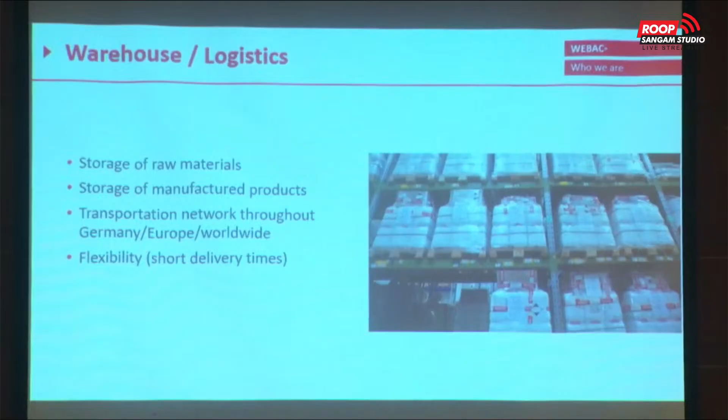Also part of our logistics is the storage of raw materials and manufactured products, because we want to be sure that if you give us an order, the materials needed anywhere around the world or in Europe can be delivered in a short time. That means about 98% of our materials are in stock, depending on the amount, but we keep enough in stock to make sure we can supply each job site in the world quickly.

By not only selling our canisters and our material, a big focus for us is also training—hands-on demonstration, whether in our warehouse, our house, or on job sites, including on-site training and on-site visits. Especially for bigger upcoming projects, we travel and are present on the job site to discuss solutions and method statements with engineers and designers. This can be done by me or my colleagues as application engineers, or if necessary, our R&D manager is also available for special cases.

Where are Webac products used? There are many points on the market, but the last point, restoration of existing buildings, is our main focus in the Europe region. This means we have a lot of materials for restoration, crack repair work, and injection against rising moisture, but also other big projects like dam constructions. You'll see some pictures and maybe videos about these constructions. Tunneling and mining is also a focus of ours.

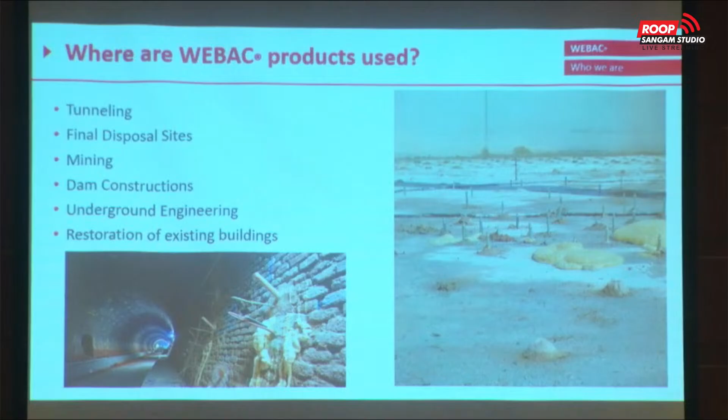What are Webac products used for? As I mentioned, injection against rising moisture—we speak about wet, damp, or dry cracks—structural repair works, joint sealing, and surface sealing for underground building components. All of this we try to cover, whatever the case on a job site.

Our main product range is polyurethane injection foam resin, PU injection resins, and injection gels, which are becoming more common for crack repair. For example, epoxy resins, silicate injection resins, and to cover all the services around them, injection pumps, packers, injection tubes—which are a good solution especially when building up your construction—and swelling tape. So we try to cover all services around construction and waterproofing.

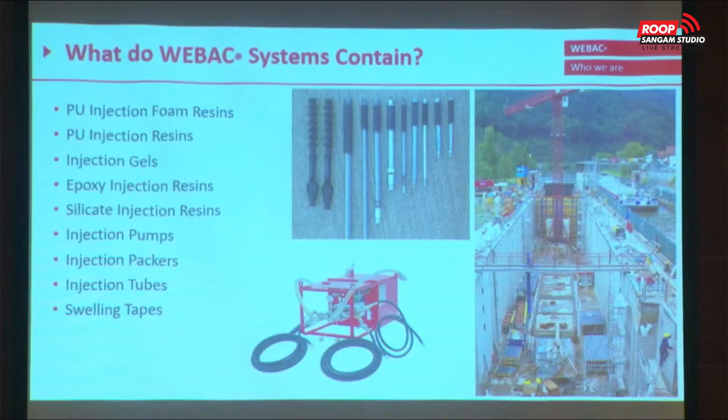So what does Webac offer? Innovative products—our formulas in the canister, our knowledge collected over more than 40 years. Complementary accessories, because the best product has to be applied with the best accessories; this is a necessary combination, otherwise it won't work. Quality products, service and training for clients and customers, being present on the job site, and of course, one-point individual solutions.

That means if we see that a special accelerator or product is needed for a kind of project, because of our R&D and short ways to them, we can deliver a total solution—an individual solution for your case.

Webac walks on two different legs, I would say. On the left side, we have the classic line—you see the building, it's more on the upper part of the surface, not strictly underground. The right leg is our consolidation line, which is more for underground construction, tunneling, mining, water stopping, but also soil stabilization and soil improvement, which is becoming more common in Europe because of climate change.

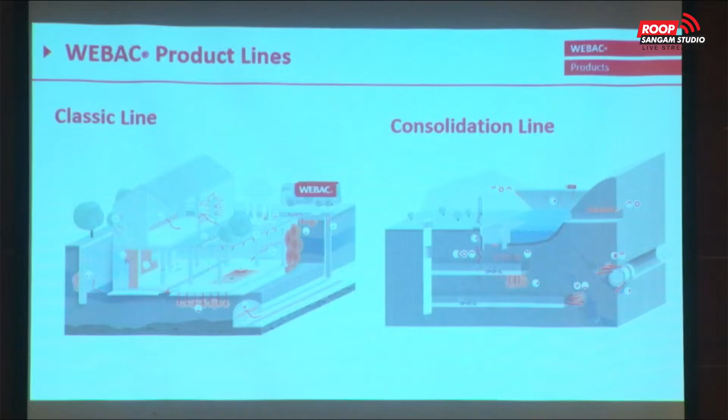Let's start with our classic line. You see the whole variation of where the products can be used, but we'll go into more detail regarding crack repair and waterproofing. Here you see special pictures showing variations of cracks. We have different options to seal cracks, and this is the point where I want to talk about the standard product line, the classic line.

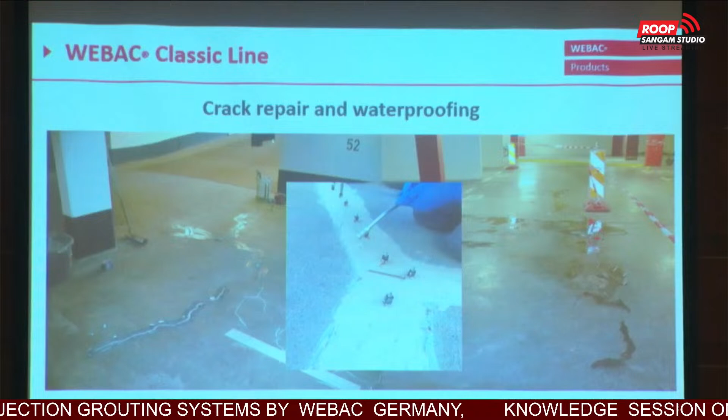Just a short overview of what we observe every day on the job site. When we speak about crack repair, mainly in Europe but maybe worldwide too, we speak about the crack repair norm, which is EN 1504-5. What I'll show now in a short table is what we face every day.

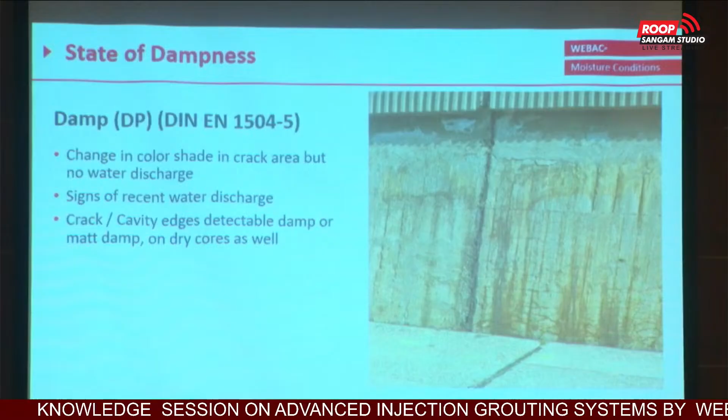We face dry cracks, where there's no impact of water—one case you find on the job site. We have damp cracks, with signs of recent water discharge, meaning black or dark shadows beside the crack. That gives us the indication it's damp, so we have to choose the right material or the right renovation approach.

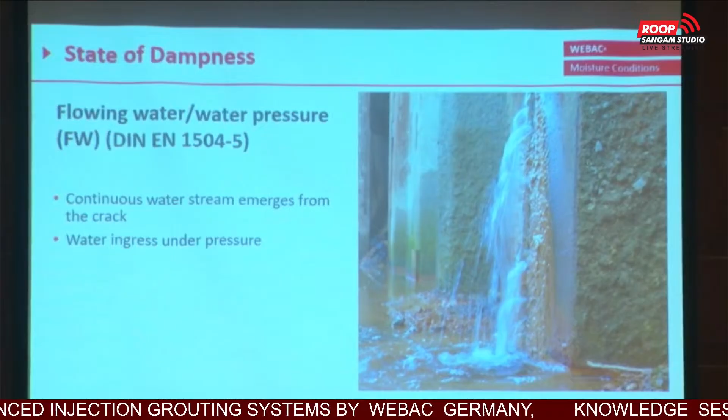We have wet cracks, which I'd say make up 80% of the cracks we find on job sites—water leakage, dripping water, a small amount of rinsing water coming out. This is actually what I like, because it's a big advantage. Then we have flowing water with water pressure, which is also common, especially when you go down into an underground pit and face a lot of groundwater, including salt or whatever gets flushed in. So these are the four cases we face, according to the norm.

This means we have swelling products, swellable products. I will come back to these products later, which will also be applied in cracks.

Let's go a little bit deeper into the theme of crack repair work. You remember the last case, water stopping, water pressure, what we have on job sites. Therefore, we have injection foam resins present on the market. Webac offers different types of them, and here we speak about the 15 numbers of Webac.

This means we have high expanding of the resin after it gets in contact with water. That gives us the opportunity to block and temporarily seal by an open pore foam structure. That means it is necessary for permanent waterproofing to pre-inject after you stop the water. This is according to the regulation of crack repair work, but they are mostly water reactive, and in cases where there's no water, they won't work because they find no partner to react with.

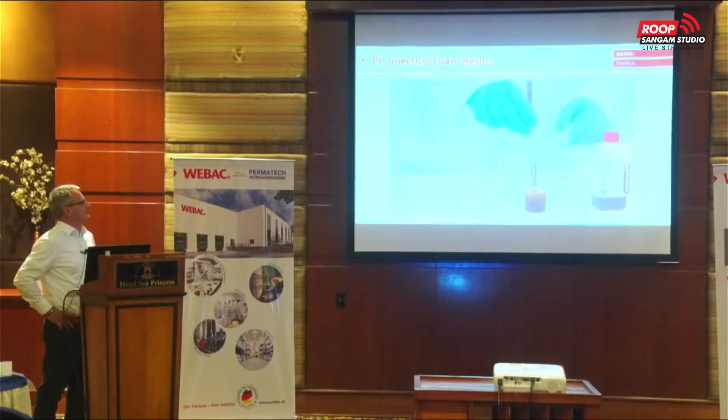You fill it, mix it, and for each product range or product, whether epoxy or polyurethane, we also have special accelerators if needed. Let's say if it's too slow for you, we can accelerate it to a faster system.

So now this is your pump hopper. You fill it in, nothing has happened. Maybe a fine skin will form on top, but if it will be injected now into water, via your pump, via your packer, this will happen in the crack. It will be pushed into the crack, and after a couple of seconds the resin will react.

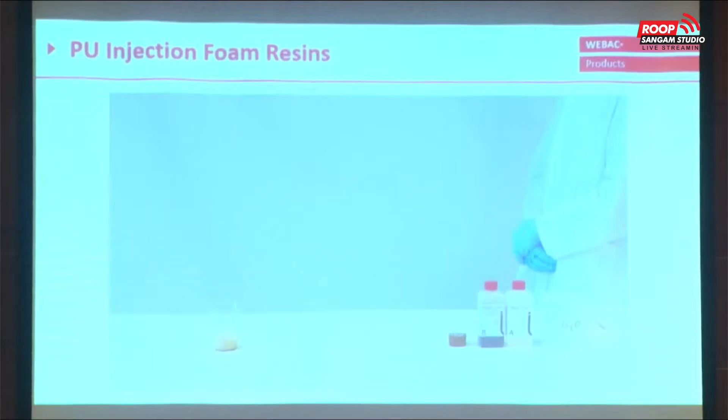This is what you want to achieve: a fast reaction to minimize any outflow of the resin you pump into the crack. There are some tricks to overcome that, maybe injecting deeper or something else, but these are technical tricks. This is the pure performance of the resin.

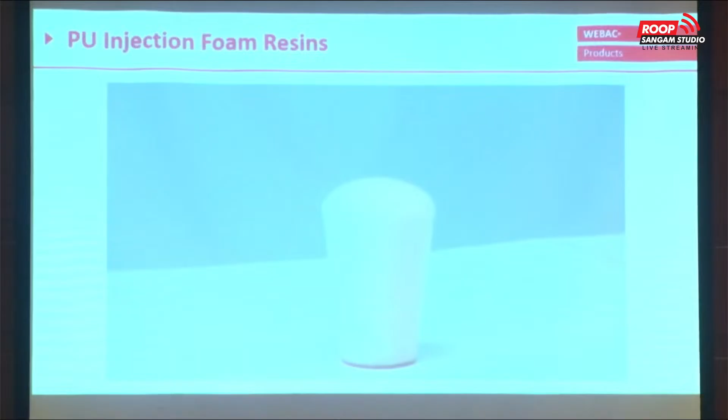Now we have roughly, I would say, a foaming factor of 40 times, depending on the mixture and the turbulences. My colleague will now open the foam so you see the fine pores, the fine structure, which pushes the resin also deeper into the soil. It's really brittle after a couple of seconds, and he will open it. It's a fine open cell pore structure. That means you have to pre-inject if you want it permanent.

This is free expansion. In the crack we won't have this; we will only have 1 or maximum 2 times the expansion. So also an open pore, open cell structure can waterproof your crack for a period of time, depending on the pressure which pushes against your crack or joint.

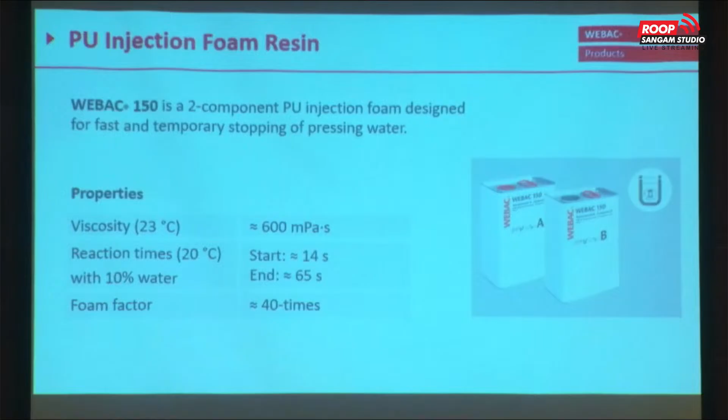Between the foam resins and the pure rigid injection resins, polyurethane injection resins, we have so-called combi injection resins. They are foaming, but not with that haze we saw before. Here we have a flexible structure, and it's a closed cell structure. Before we had the open cell, this is a closed cell structure, slightly expanding, and they react with or without water. In parts where they find no water, they react. In parts with water, they start foaming, which pushes the material deeper in the cracks or in the soil structure and gives the waterproofing. This is the difference.

The most common products developed in the last years is a real monocomponent resin, which means you have only one product on the job site, one polyurethane resin, and the reaction partner is water. That means you don't need any accelerator or catalyst, though you can accelerate it if necessary. Nothing happens in the pump, so you have only one canister - mixture failures will not happen. You grab your can and inject, and you have a permanent closed cell structure. Such products are also tested according to the CE norm, the European crack standard.

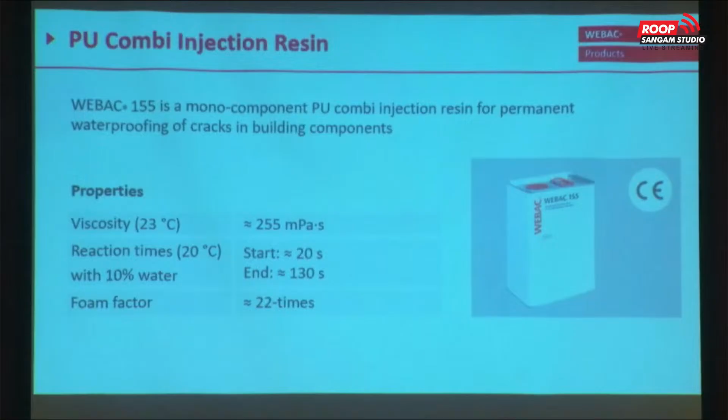Then we come to the pure injection resin, which is for permanent sealing. It's mentioned in our 14 series. They are also water reactive, slightly expanding, cures with or without water. They have a good elongation. For crack width between 0.3 and 0.5 millimeter, we have an elongation of 5%. Wider than 0.5 millimeters, we have an elongation of 10%, which is really, think about it, you have this fine crack and that elongation - that is totally enough to cover a lot of movements.

One point which is marked a little on the last point - variations with high strength development are also available. There are polyurethane resins where the strength development compares to an epoxy or to a high-end concrete. We speak about 60, 70 Newton per square millimeter. I'll come to that shortly.

Here we see a reaction of such a form. Have a look at the viscosity - we speak about 80, 90 millipascal seconds. If you have it in a canister, it's really liquid. That gives us the possibility to penetrate fine cracks, fine fissures, and deep structures. This is not real time, it's a time lapse, because we want to push the material or inject it as deep as possible. If it reacted earlier as a foam, you would not be able to get into the depths, which is important in this case.

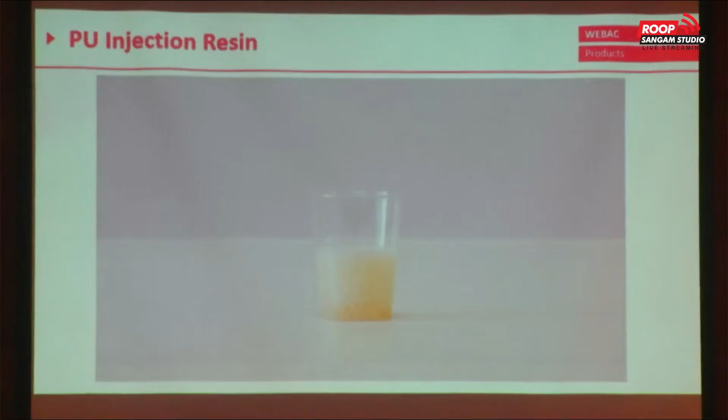So it's a slightly foaming product - for this I calculate roughly a 5-time expansion, 8-time expansion maximum. You see the viscosity, roughly 90 millipascal seconds. In areas with high temperatures, the viscosity will also be pushed down - we speak about 60 millipascal seconds here, which is really low viscous resin. Reaction time starts at 2 to 3 minutes, depending on the moisture inside the crack, and foaming ends roughly between 5 and 10 minutes. But the pot life of this material, if you mix A and B together, is 120 minutes. That gives you a lot of time to go forward with your injection, jump back, re-inject, push it as deep as possible in the structure, and you are safe that you do a good waterproofing at the end.

This is one of the products, Webac 1660, I mentioned before - a polyurethane resin which develops a high bending tensile strength and high strength development inside the crack. We speak about 70 megapascal, 70 Newton per square millimeter without any contact of water. Of course, it will slightly foam, and this minimizes the strength development, but at the end we are always higher than 35 or 40 Newton per square millimeter with a foamed product. It will be used in concrete where you had bad pouring, where we have honeycombs. So it fulfills two targets: it gives the waterproofing on one hand, and on the other side, it gives strength development to the weak concrete or areas where the concrete is weak.

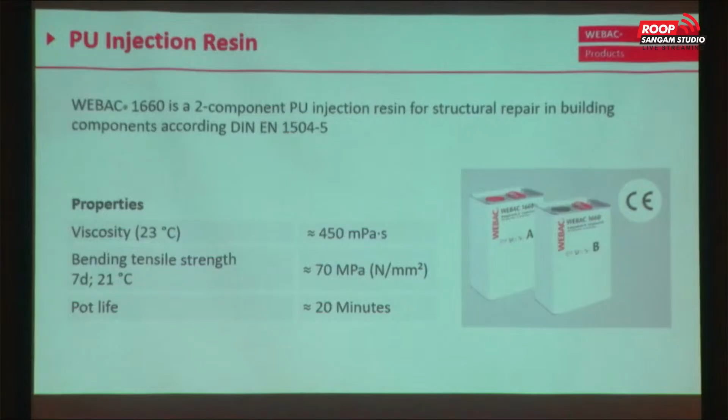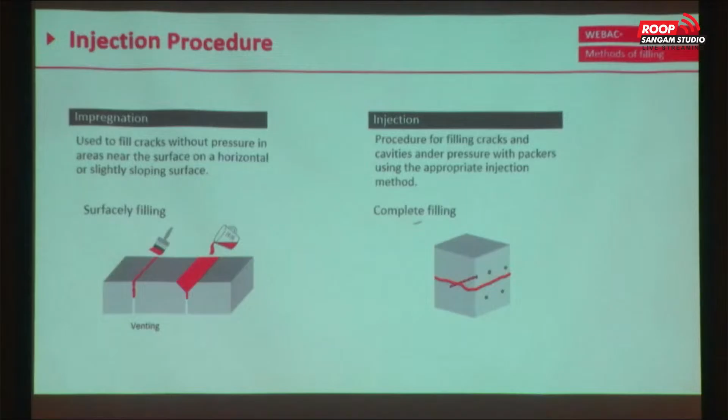If we speak about crack repair, we have two options. We have surface filling, which means by gravity. Sometimes it's not necessary to drill into the structure, especially if the cracks are more on the surface, not so deep. In some cases you open and cut the crack a little bit, and fill it mostly with an epoxy resin. If you used a polyurethane resin, the foaming would be critical because you can't penetrate deeply enough. So we recommend filling with epoxy resins, and this is 95% of what you do outside: drill through the crack in the middle of the structure, then start the filling, because then you use high pressure which pushes the material really deep into the structure.

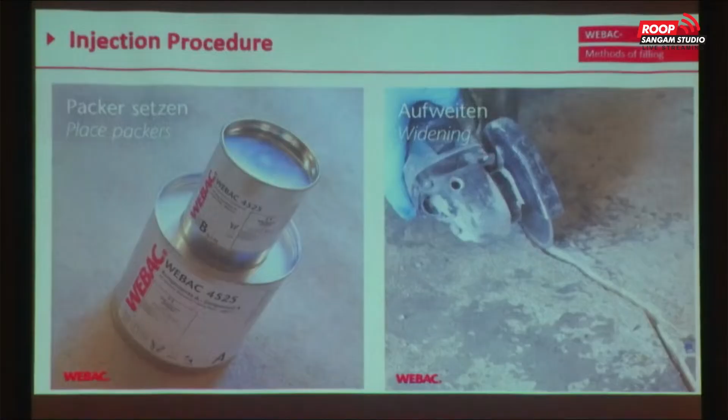Some examples were additionally done. On the left side, we did a crack repair where we did not drill the packers. I'm sure you've used that before - there are surface packers available. Let's say if you are not able or not allowed to drill for any structural reason, then you can use surface packers. You patch that with an epoxy resin, especially in vertical applications. It's necessary to patch it, otherwise the resin will disappear.

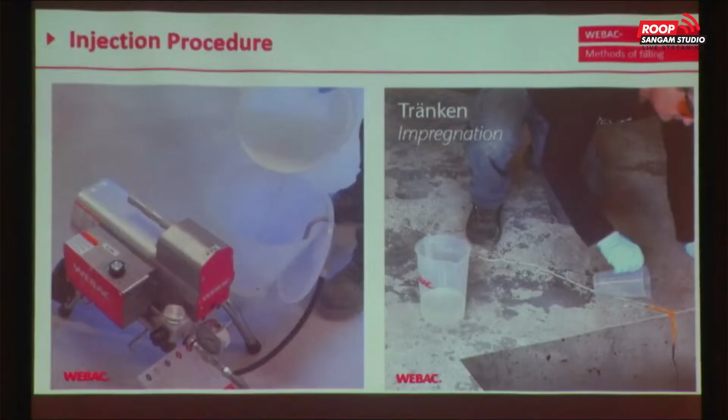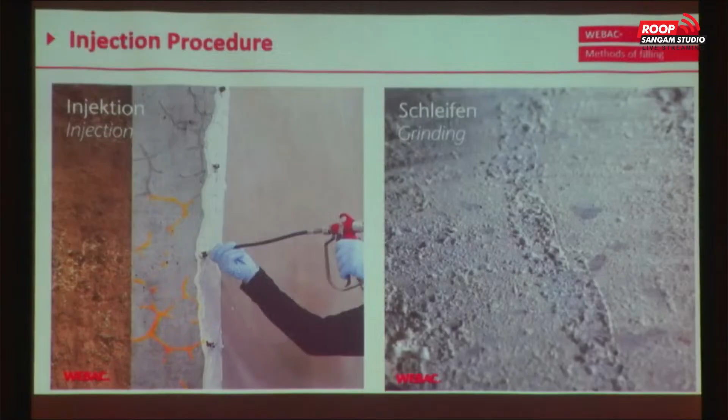On the right side you see filling by gravity. So we prepared the crack, made sure everything is clean, removed the dust present in the crack after grinding or drilling, and then refilled it with epoxy. Whatever you put on top of it, we prepare with a little bit of quartzite on the surface as a good grinding basement. And like I said before, if you finish on the last packer, go back to the first packer and re-inject, because the material disappears into fine fissures and you have to refill your crack. Otherwise it might not be enough filled. The target is 90% should be filled, so that's why you should always go back during your pot life.

So here we come to a point you remember - swellable products, or the swellable category. Here we speak about acrylic gel. I guess you've heard about this or applied it. It was first done as a curtain injection against moisture coming through your building, but it can also be fitted for cracks because of the low viscosity we have there. The advantage of this kind of product is high adhesion on dry and wet surfaces, which is really high, and high dimensional stability, so it's really flexible outside in the soil or even in the joint. It has high elasticity and is CE certificated with a polymeric version.

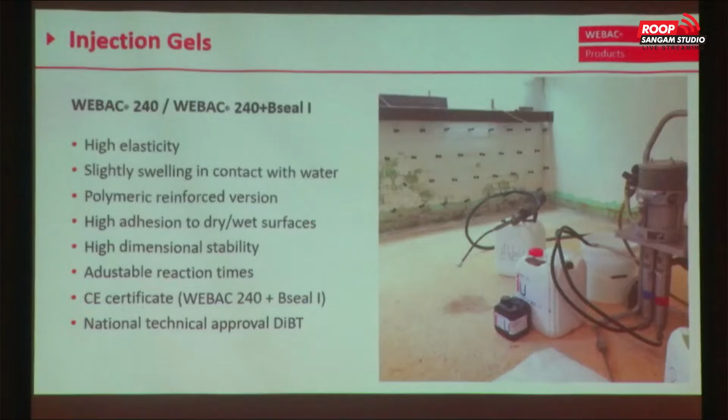Just to demonstrate how this kind of acrylic gel works - it's also a two-component product you prepare first. And this is not a time lapse, it's real time. So it's like water, but from a certain point it starts increasing in viscosity. This is the point where the water can't dilute the material anymore, and where it starts its sealing effect.

Another advantage of this kind of material is that you can adapt it to the needs on the job site. If you have flowing or pressing water from a movement joint, for example, you can add more accelerator to make it faster, or you can slow down the reaction. For example, if you want to spread it in soil with less permeability, you can reduce or extend the reaction time up to 15 minutes. This gives you a good penetration range, so it's adaptable to the needs of the job site.

This is where this product is mostly used - as a curtain injection. That protects your building against moisture pushing up from the outside on the whole surface, not only on the crack but across the entire surface of your building.

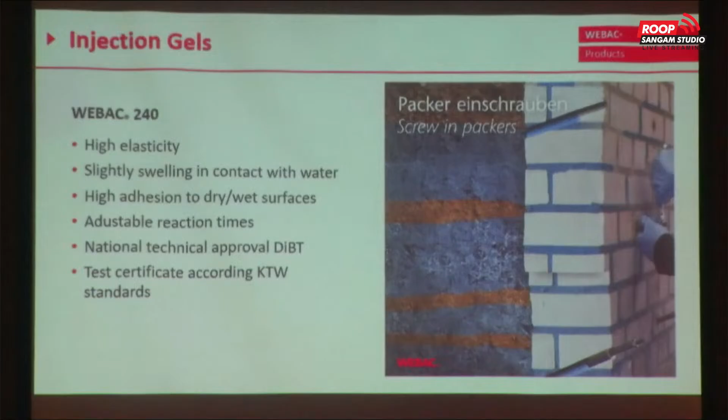Just an impression of how you install and apply it. You see the difference between standard packers is we're using bigger, wider packers, because we need a higher material flow outside, behind that building, to create a curtain.

From the technician side, once you finish your work, the advantage is you can clean the pumps properly with water. There's no cleaner needed, so you flush the pump with water, which is also an environmentally friendly point. No critical substances needed to clean the pumps.

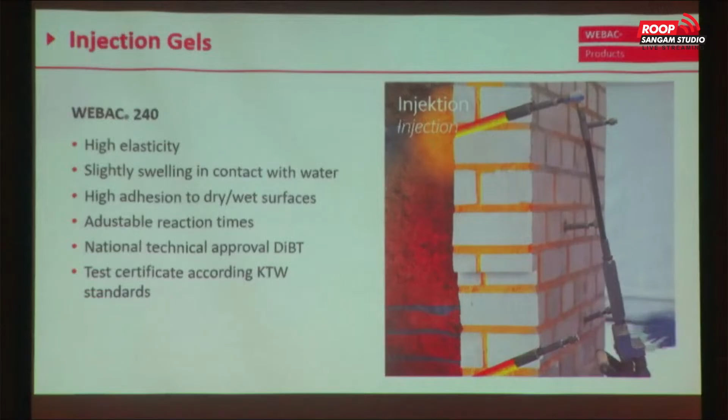How these products work: the moisture inside the soil gives the flexibility and adhesion of the material. And of course it's necessary that you re-inject - if you finish with your last packer, you re-inject the first packer to make sure you get behind the curtain properly.

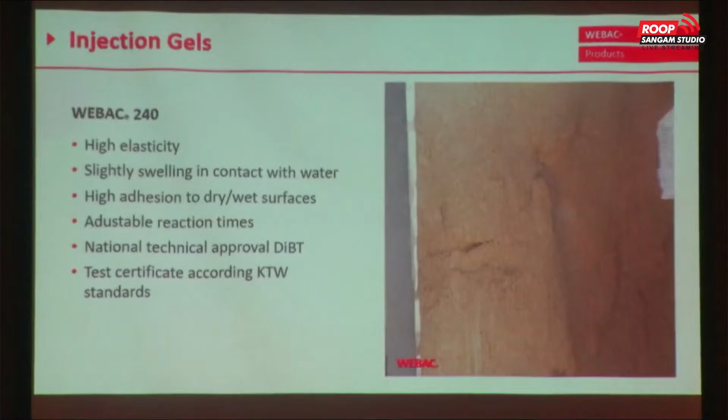This is a mock-up we use for our trainings, and you see the bubbles, which give you good overlapping. You can't see it in the soil, but here we see it well, and clients try some options to inject, and when we open it, they're surprised. They think, okay, we penetrated everything, but there's a hole there, and there's a hole there. So it takes a bit of experience to know how to build up such a curtain.

The additional component we can add to this is a polymeric reinforced component. It's like a milk, a white milk. The advantage of such products is higher adhesion compared to standard acrylic gels. Because of that reinforcement, you have less shrinkage, and you also have adjustable reaction time.

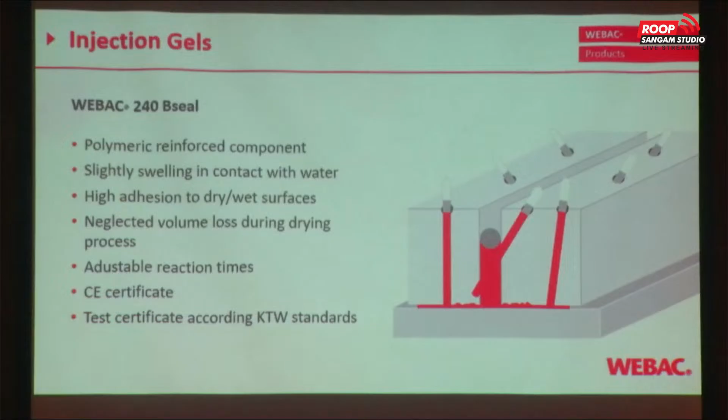To show this kind of adhesion, we prepared a joint during our seminar here, and believe me, there was no preparation on the concrete surface. It's pure material that we added, and after 1 hour, once the material is really rigid and cured, you can do this with your joint.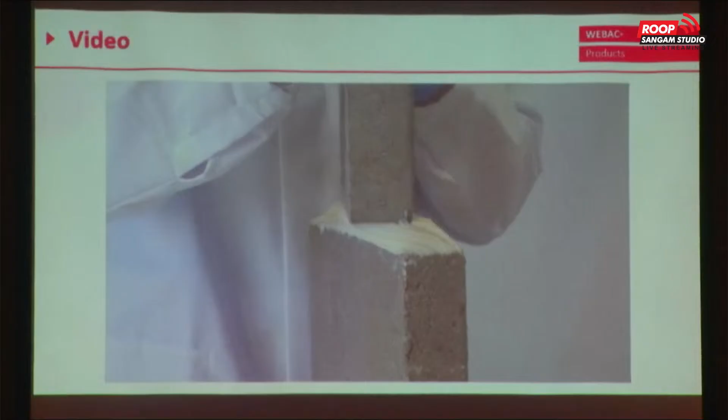But I think, or I guess, if you have this happen in a joint, you should better run, because there must be a bigger problem. This won't happen in a standard joint.

And for all joint sealings you have, let's say, in the middle of your membranes or whatever, that's not a problem for this material to get good adhesion to foils or membranes. Because of that reinforcement and polymeric component, this creates adhesion to most all critical membranes on the market. Here, worst case scenario, like I said, if this has happened, you should be somewhere else.

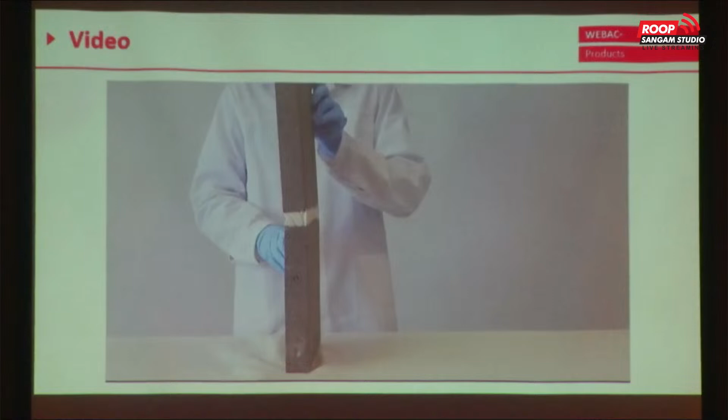Here are some ideas about application in a tunnel. We've faced a lot of projects where they installed membranes as waterproofing behind TBM segments or shotcrete, and because of some demolitions we have to seal it. Therefore, a material with a good adhesion factor on each kind of membrane or sealing compartment in tunnels is a good solution, a good idea.

So that was an overview about the first leg we're walking through, the standard products, the classic line. Now we're jumping into the underground areas - that means tunneling, micro-tunneling, bigger TBM tunneling, mining, and dam construction.

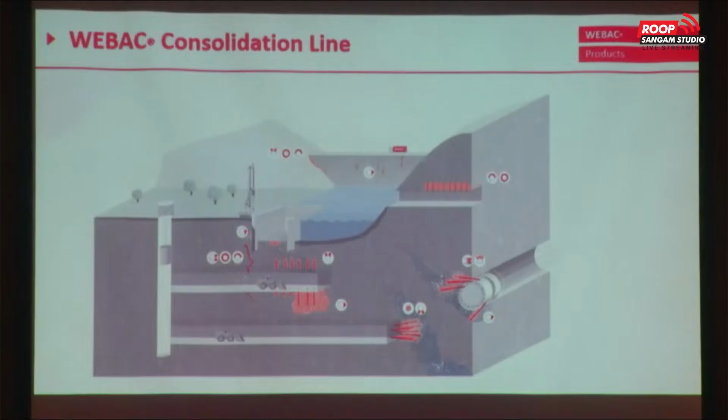Therefore the consolidation line was developed, which gives you a similar product choice to what we know from the standard line, but with some different modifications. Here we have injection foam resins, the injection resin we had before, but also silicate injection foam resins, silicate injection resins, and a hybrid system - I'll mention that last point later.

And of course the accessories, the injection pumps - here we're speaking about bigger pumps, delivering 15, 20, 30 liters per minute, which are sometimes necessary to stop water ingresses or to fill cavities with such silicate foams.

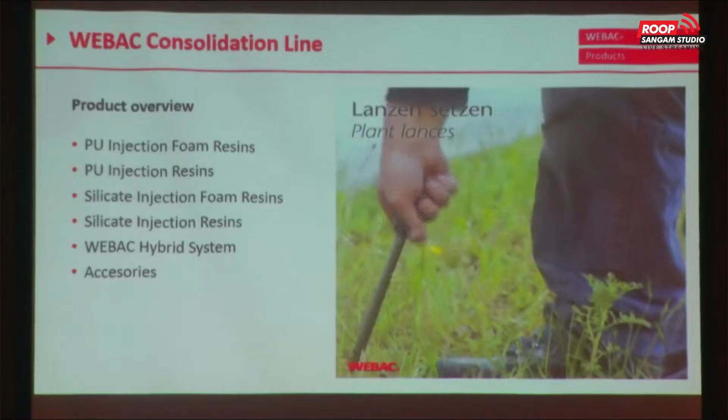Just a short idea about such kind of an application. Accessories, the last point here, my colleague Maurice is demonstrating that. That means ram injection lances, drilling lances, whatever are needed, we have also the option to provide them. This is how it will standardly be done, drilling or setting injection lances in a certain distance, which we talked about with the designer to make sure that we have coverage of the soil, overlapping of the soil, and then the material will be injected.

Here you see some openings. There are some different versions of injection ram lances available, with a loose bit, without openings. So there is a good range to adapt on the needs of the job site.

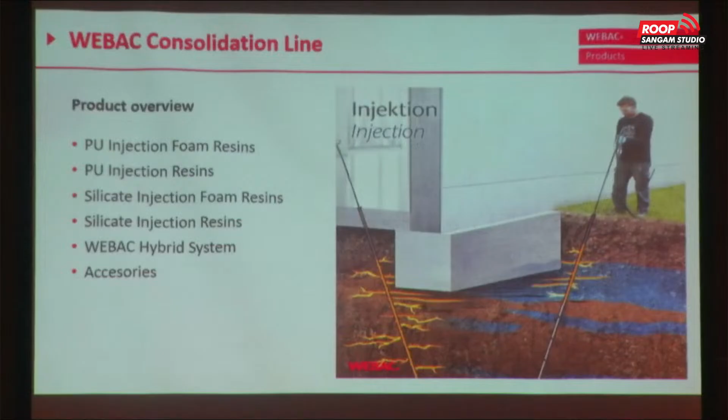Also easy, no big technical preparation for the mixing. And one important point here, we speak about two component systems, not one component, because of the faster reaction, or let's say the different reaction times of the products themselves.

Let's start with the foam resin. You remember the Webac 150. Here we speak about PURstop 1C. It's a polyurethane resin where you can add an accelerator from 1 to 10%, which gives you different ranges on the foaming factor, on the reaction time. Here we have a 60 time free expansion, which is a little bit higher than we know from the standard line. But the reaction time, the starting and the end, will be similar to each other foam. And this is, like you heard before from the standard line, from the classic line, also an open pore foam structure, cell structure, so that means we have to pre-inject if we want it more waterproof or for decades.

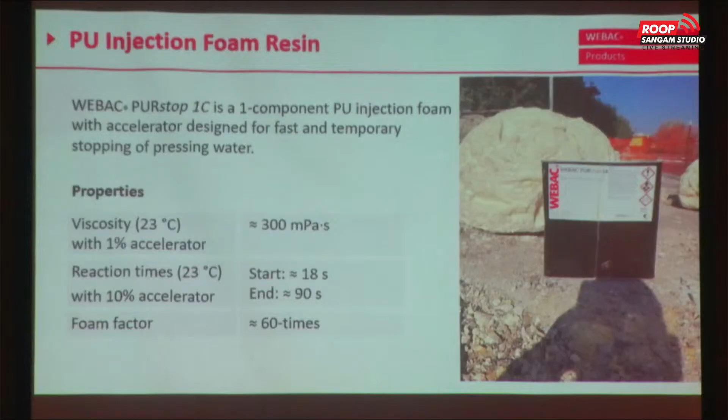The flow limit of the standard version is roughly 40 or 60 seconds, depending on the temperature. That means we have a fast setting time, and we have to work with two component pumps. The foam factor is slightly between 1 and 4. This is totally enough to use that kind of material as a water stopper.

The important thing is 80 Newton per square millimeter, of course without any foaming. That means this material can be used for anchoring as well, or for soil structure stabilization or slab lifting, which has been in each mouth the last years. But compressive strength development is a big advantage of this product.

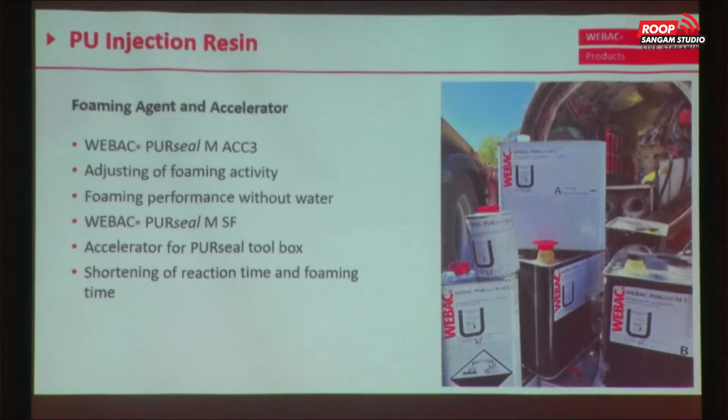Webac Sil Fill. Sil means silicate resin, a silicate foam resin. Such kind of products, silicates, will be used more for cavity filler, not especially for waterproofing, because we want to fill cavities. The photo shows a job site in Italy where we did this injection, I'll come back to that later. But the target with the foam resin is to close the gaps, to close the voids, and last but not least, to stabilize loose rock or gravel.

Reaction time is really fast, we speak about 30 seconds, then the foam starts. But keep an eye on the viscosity, it's 50 mPa·s, it's like water. But after 30 seconds, you get a high expansion of that, and you get a high foaming capacity and lightweight foaming with a 30 times or 40 times foaming factor.

Here we're speaking about cavity filler. Sil Compact is a brother product of Sil Foam, the foaming material. It has a high viscosity after mixing, so if you pour it into water-saturated areas, it won't mix as easily—you push out the water with that resin. This means you can use it for soil strengthening, anchoring, or similar applications.

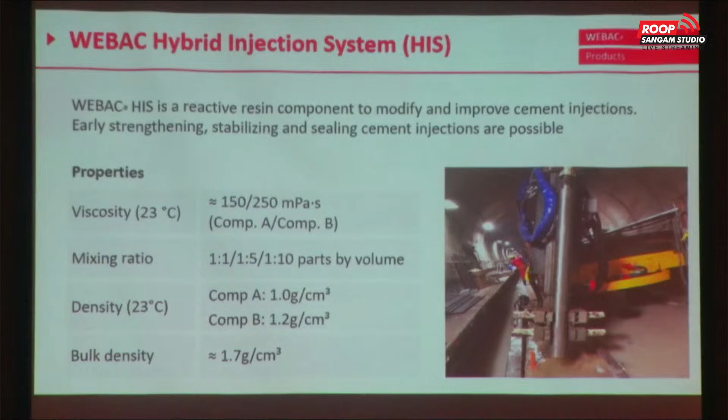How does it work? The upper build shows the cement blend you'd have on the job site, the local cement. By installing a two-component pump—here a small gear pump—and a flow measurement, we can control the mixing ratio of cement to grout.

It's not necessary to use the product permanently—only in cases where you have issues can you apply it.

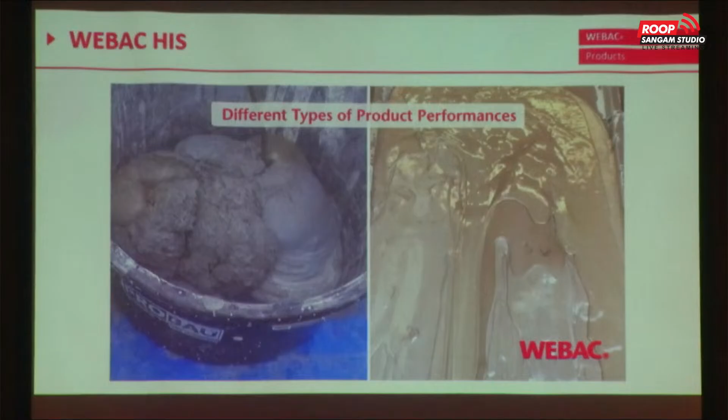That's the end of the first presentation. I prepared some additional slides for you. I hope it works. You've heard a lot about the products now, and I don't want to confuse you—I use this approach in seminars, on-site trainings, or site meetings to show real cases where we've been involved, which may be well known. Maybe you stood in front of a wall or in a tunnel and faced that problem. I think this is where we can demonstrate and talk about these situations, give some ideas on how to solve it, where we solve it, and make it more understandable.

So you remember that picture—we'll come back to that later. First, you start with a silicate foam resin. I forgot to mention, silicates are cuttable, and this is important if you have to strengthen or inject in front of a TBM, for example, because it gives the TBM cutter head the option to cut through that consolidated area. If you used a big amount of polyurethane resin, there's a risk the cutter head could stick because of the gluing effect—if polyurethane gets warm or heated, it starts gluing, which may cause difficulty for your cutter head in the TBM or microtunneling.

So therefore silicate resins are designed so the TBM can drive through, cut, and dig through that consolidated area. Coming back to the job site in Italy, that was a rehabilitation of several tunnel sections. You see one of these tunnels here—it looks nice, bright and shiny from the front, but once we entered it, the case for using silicate foam resin was that they did some core drillings and found big, wide, huge cavities on the ceiling of the old tunnels. First the decision was to use cement, but the concrete thickness wasn't very thick in the back or middle of the tunnel, so injecting a lot of cementitious grouting would add a lot of load at that point. Therefore we decided to move to a silicate foam resin, a lightweight cavity filler that's also stable enough to protect the rock or gravel from falling down.

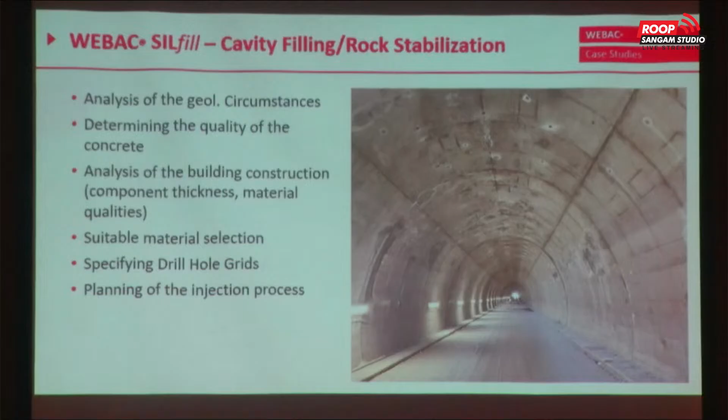If you have geological information, you know more about the structure, then you can find a suitable material selection and the specific distance between each drill, or which drill size you have to choose.

The red marked points there are the openings that we drilled. We drilled with a diameter of 50, DN50, to get good access to the cavities behind. And cavities we speak about - I couldn't believe it, but I took a lighter and looked into a core that was drilled out, and there was a huge cavity. It was, I guess, 10 cubic meters of nothing inside.

So this has to be filled step by step, to make sure that if you widen the tunnel like they do here - this is the tunnel - that everything is safe for them, that everything is fine to get that work done without any risk.

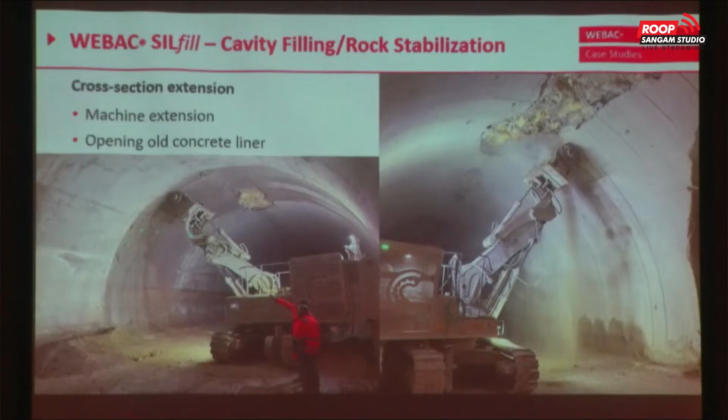The yellow parts on the opening section are the silicate resin, and it was a successful process injection there. Last but not least, the client was a little skeptical about it, but at the end, when he saw the result after the first test injection, he saw the advantage, and it was accepted. We did, I guess, 3 or 4 tunnels with the same system.

Another thing is, you know that if you use chemical injection, you're always faster. Cement has to cure anyway, that takes time. Chemicals are much faster and develop more strength in a shorter time.

Okay, another product: here a sealing of movement joints. You remember the acrylic gel, the swellable product for that. Here the Bseal, the polymeric reinforcement, because we're talking about a movement joint with a width of, I guess, between 3 and 5 centimeters.

There was a water stop mounted in the middle of the concrete slab, but water was coming out because there was damage to the water stop profile. So we had water pressure here, and the tunnel was near the harbor. And another effect here, because we tested the water before...

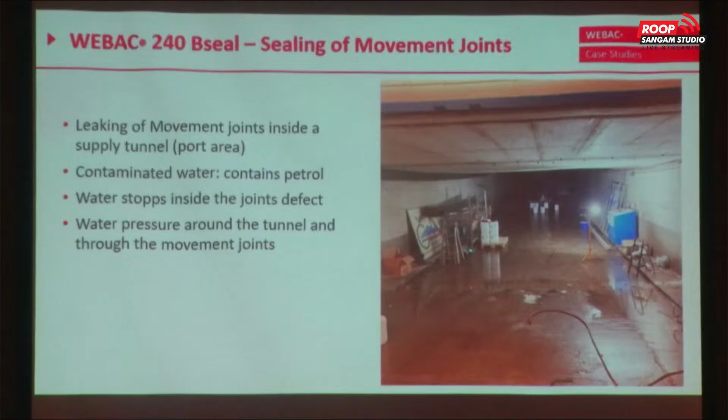Yeah, the setup is done. It's a 1x1 system, that means measured by volume. And here I show the application itself. So both lines A and B are separated, pushed to the mixing head, and in the mixing head you get that mixture. It's a small plastic mixer, totally enough.

You see the material will be injected, and in a movement joint it's easy. You start on one point, you drill a lot of packers, but immediately it flows and fills the whole joint easily. Here you see the water get pushed out.

It gets white now - then we know the polymeric version is there. Here we have the pure water, but here also the white one, the white milk is coming out. That gives us the sign that the material is pushed into each region.

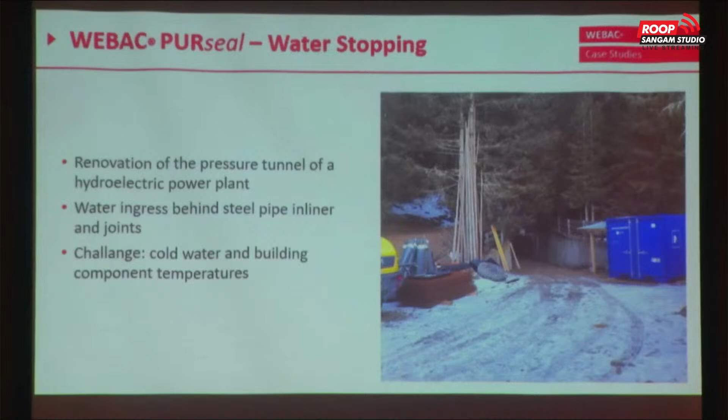But here, that was the case - cold temperatures on the building component and the water, which faces us here. It was a tunnel from a hydropower plant. The diameter was, I guess, 190, roughly like that.

The logistic part was also bringing the pump and the material to the injection points. We speak about 500, 800 meters. It was cold outside, -20, but if you carry the canisters you will be warmed up easily. And a closed space for the working also there.

You see the tunnel itself was a concrete lining, but because of some rock movement, they had damage and put some steel liners into that in the past. But because of now additional movements, there was some water leakage coming out of the connection of the steel liner to the concrete, and this is what we faced here. Just think about it, the temperature of the water is 3 or 4 degrees.

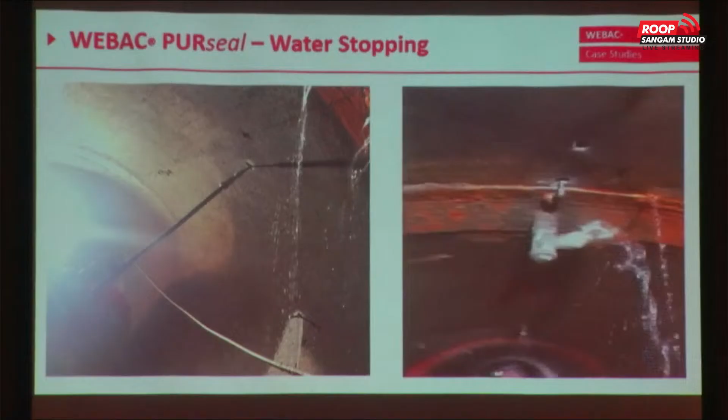So this is one of the injection points. Of course, we had some cracks where we also injected, but we had also more pressing water there. This is before we started the injection.

On the left side of the picture, you see the distance we moved away from the sealing point. This is because of the cold temperature, and because we use the water stream, the water movement, which goes from left to right in this case, as a reaction starter for our material. So we pumped in the resin there, it starts foaming immediately because we had to accelerate it extremely, and this creates bubbles. I think it was maximum 2 meters.

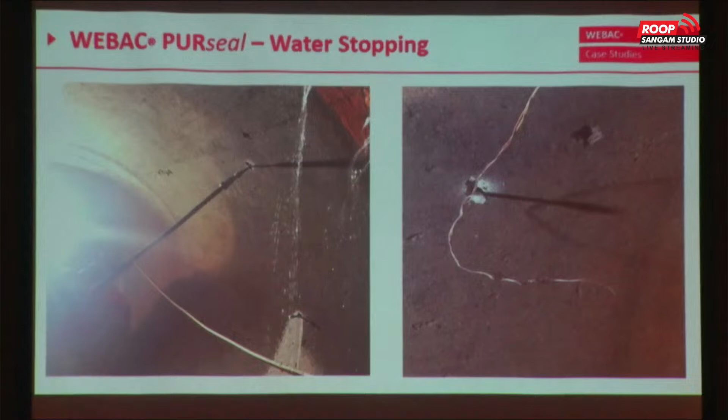From the injection point to this point, these 2 meters are totally enough to create some bubbles and to create a block after a certain time. And if you have that block, if you see that during the injection, you can probably switch back to your standard material because then you can pump easily to go wider into the structure.

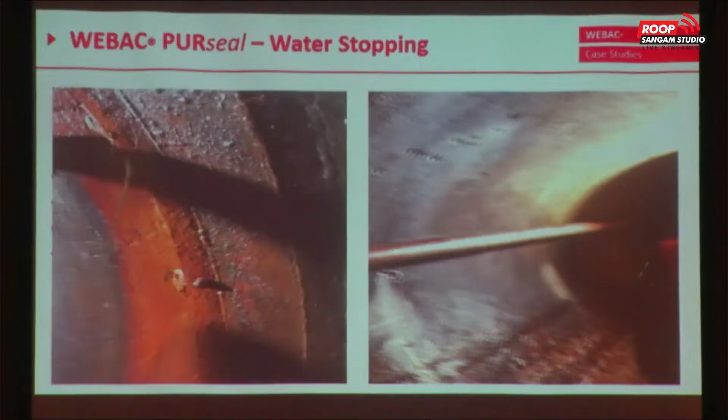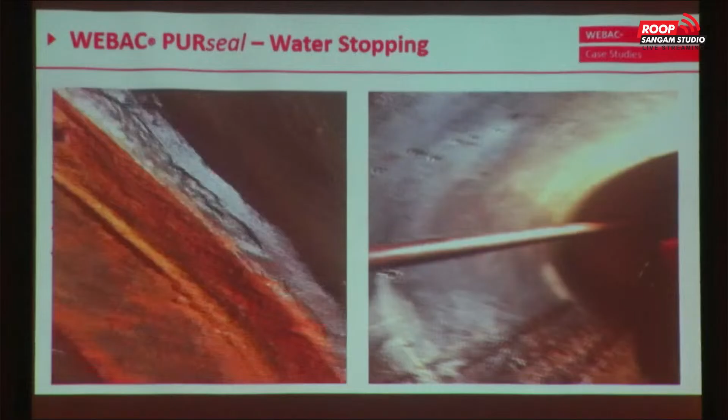And this is after the injection was done. On some spots you see some bubbling. That means that the resin is always in a process, it's reacting afterwards. So that means maybe if this would be leaking, when you come back the next day it will be sealed, because the resin is always working - especially in cold temperatures, it takes a little bit more time.

And there we pre-injected it with the standard version, just to push it as far as possible, therefore it reacts a little bit slower. Like I said, I won't miss that toolbox, we can adapt it to the needs on the job site. And mentioned again, drinking water certificate system - no problem in potable water areas or groundwater areas.

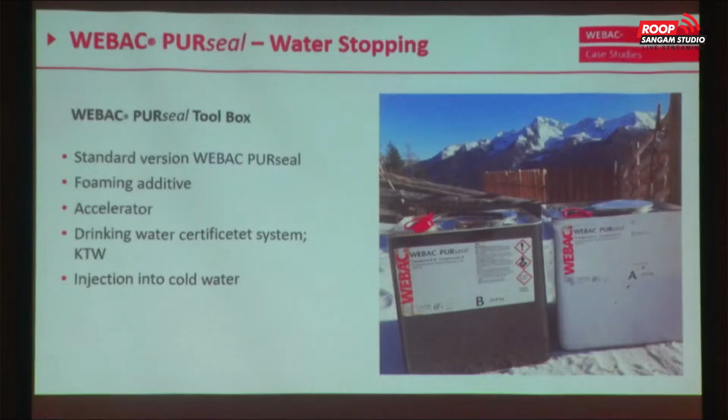Okay, that was a case we faced in Peru. A tunnel - you remember that, on this building site we took that picture. This is what we had there. You see that big fountain or big river comes out of the mountain there. That was a special case.

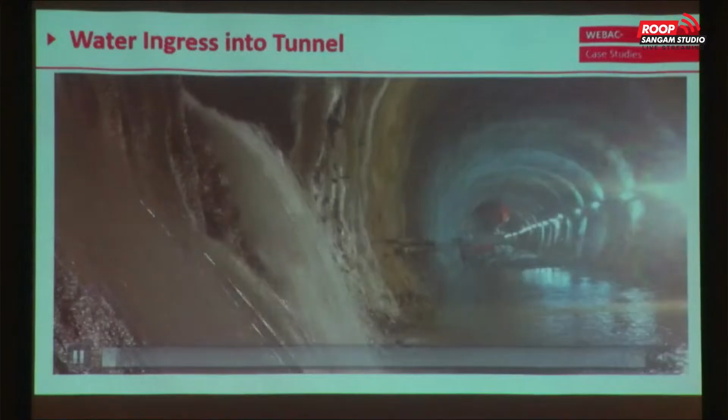I tell you, we fixed mostly all of the water leakages there, but that wasn't possible to do only by using injection material. It's not possible, so I hope I can push that a little bit forward here. Okay, that was the hydropower dam in Peru.

We sent over material because the target first was doing some strength repair or consolidation in front of the shield of the tunnel face. We went there and they said, look, you are here, but we have a little bit of a water problem. Can you come visit and see what we can do? And they shifted us to that point, and at the end they wanted waterproofing. Lucky that we had the toolbox with us.

So at the end we injected roughly 15 tons of the polyurethane resin, including accelerator and foaming agent. Water ingress was 220 liters per minute. Pressure tunnel.

There was also an issue. We used special R32 rods to inject. The factor here is it took 1 day for them, because of the equipment, to drill us 3 or maximum 4 anchors. That means you don't have so many chances to inject and get a waterproofing.

Now, those are some circumstances we faced. On the left picture, you see we started with the injection. I'm not sure if you heard about this, but for this case we also used injection lances with inflatable packers. Inflatable packers mean you push into your borehole, start pumping the resin, and the packer will be inflated, which seals the borehole, and after a certain time there's a burst plate.

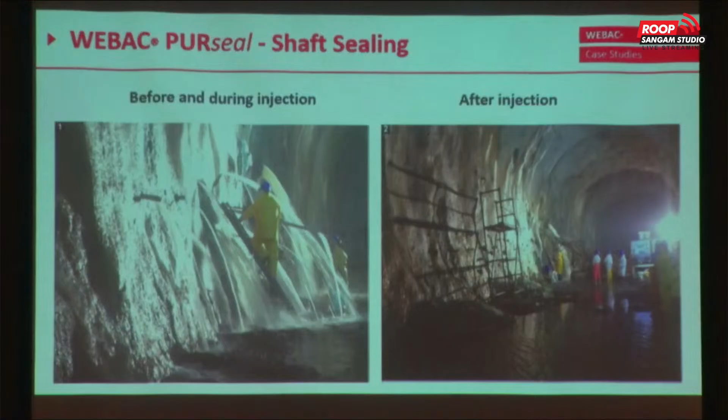But not only water - the worst case is if soil is coming additionally. And therefore, we had to do something. Cementitious grouting wasn't possible - we would have wasted a lot of time and material. So last but not least, we used the WEBAC PURseal toolbox for that case. There were only 4 access points inside the tunnel liner, meaning you have 4 options for the injection.

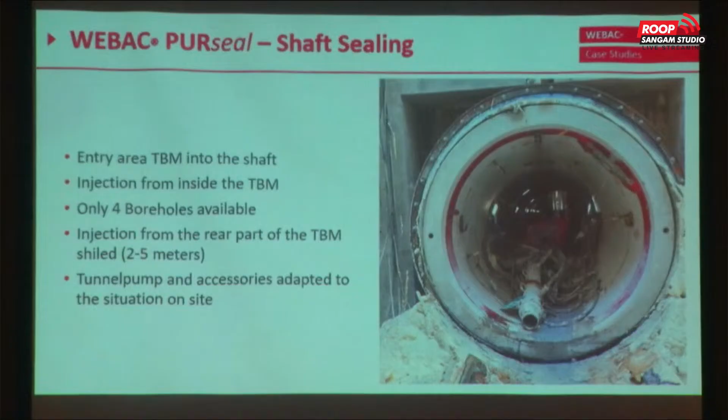And we wanted to seal it in a certain time. Therefore the decision we made, similar to the previous project in Italy, was to go back, switch back 8 or 10 meters, and do the same - inject, use the water stream, and seal the whole area around with our toolbox there.

Okay, some loose soil or ground improvement projects, which are becoming more common because of the drying out of the water, especially in Europe. Then you have cracks, your foundation collapses, so we have to do something under your foundation. That was a project where we had to stabilize the loose rock and gravel under a railway line. And the target here was that we don't have to achieve any lifting - that was critical.

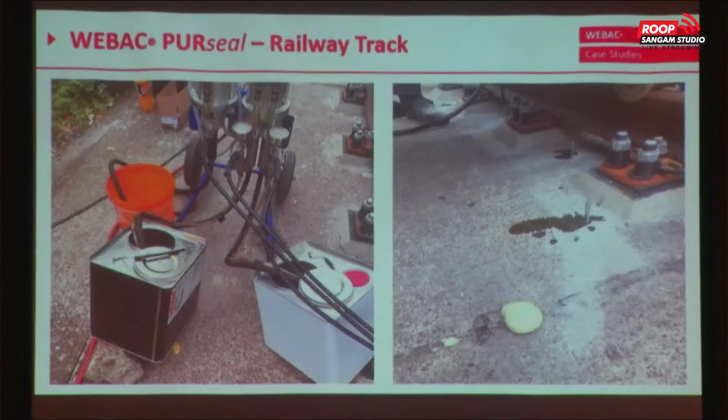So we decided to go with PURseal, and a slower version, by the way. But anyway, the injection was done from the surface. We drilled through and injected. Here you see the joint between 2 concrete slabs.

And don't be scared about this - this is wanted, because I want an opening for pressure release. That means each side, it looks worse than it is, but the pressure has to go somewhere because the resin develops a foam, and the foam creates pressure anyway.

And like I said, there was no lifting wanted, so we released that, and over a length of 2 kilometers they measured it with a special railway measurement train. We had no lifting, so that was the target there, and they were satisfied. The target was to consolidate the gravel and the ground under that point.

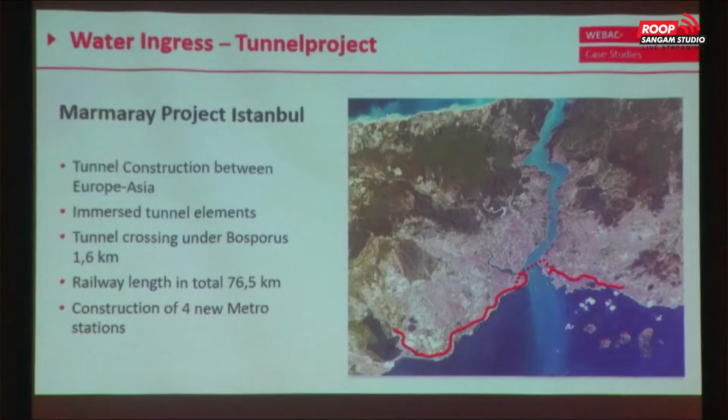For the waterproofing they used a membrane system, but we know membranes can be damaged. This was the case here, so water from the Bosporus area entered the tunnel, and we had to find a solution.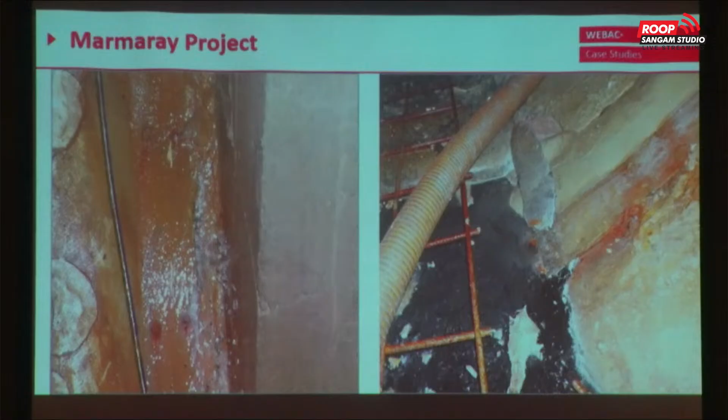On the left side, sorry, it's only a picture because during this time we had no cell phone, so I used a standard photo. On the left you see the water pressure coming out between the membrane and the concrete, and on the right picture you see the design or idea of how we can fix it.

We drilled through the concrete lining directly through the outside, through the overcut, installed packers and injected first a foam to block the water, reduce the water stream, and make sure we have a good basement for post-injection. Post-injection with our Webac 1403, the rigid polyurethane resin with a closed cell structure and flexibility, provides waterproofing for decades.

After that progress, they called us and asked if we could carry out a test injection in the segments inside the tunnel, because they had tried some waterproofing without progress — the material they used was too rigid. There was movement in the tunnel due to water movement and other factors, so it cracked over time and water came in.